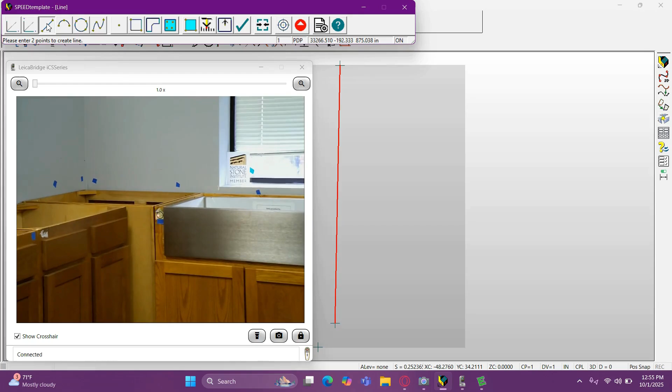You just heard my software create the line, and it made a red line on the screen. So I can now just independently move on to the next surface and draw. If there was something in my way, or if I needed to move my laser to capture a better perspective, I could do that from this mode. That is something that cannot be accomplished during the actual countertop tool—once you start, you need to commit to finishing the top when using the countertop mode.

So here we go, we're going to take our last couple points here. Here we go. And then the last edge right here.

Then what I'm going to do is shift my mode when I'm ready to draw the wall in this case. Now this isn't necessary, you don't have to do this—some people choose to stay in the 2 point line mode and take multiple lines across the back wall and connect them later. But what I'm going to do is right click on the line mode and choose the 2D continuous open line. The mouthful, I know, but all it is, is just a line chain. That's all that's really happening here.

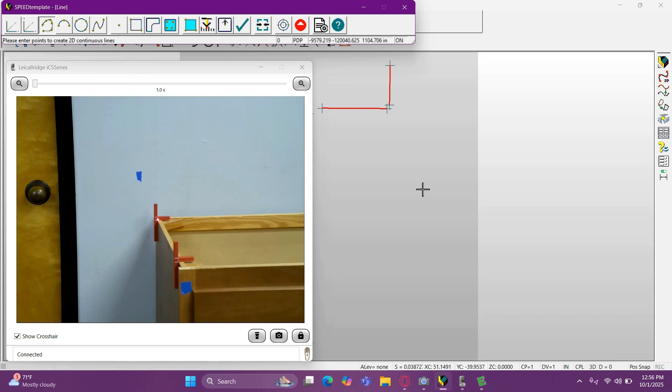It's really similar to the countertop tool's version of scribing the wall—that's pretty much what's happening. You need a minimum of 3, but you can take as many as you want in order to capture your scribe. So I'm going to be doing that here, taking my points along the wall.

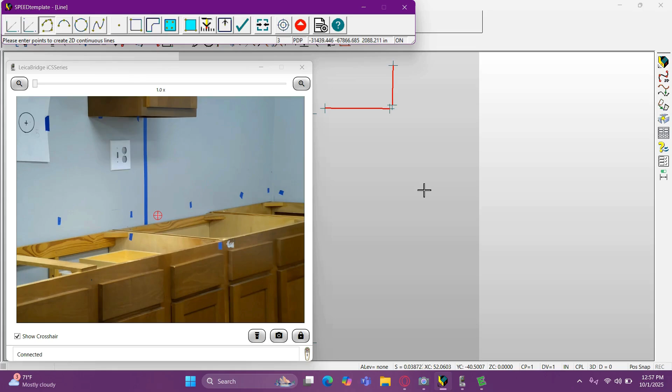Here we go. There we are. And getting closer to the end here. Now I want to take a quick moment to show you my drawing. You'll notice I have a black line here versus a red line. That's kind of going back to the temporary lines that you saw before.

This is in fact a temporary line and will not be permanent until you hit the calculate button. We're not going to do that yet, but you could, in this case, complete this wall, click on the 2D continuous line, and start another one. That would then have 2 separate line scribes.

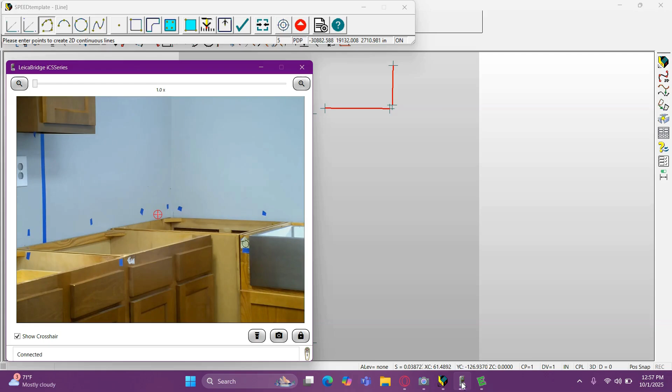I prefer to continue through the wall like so, and I'll go back to my laser's perspective here. Then I'm going to go ahead and just draw the next wall while still in the same continuous line. Oh, got to make sure I took my point there—one second, here we are. And then we'll take another one roundabouts the end here.

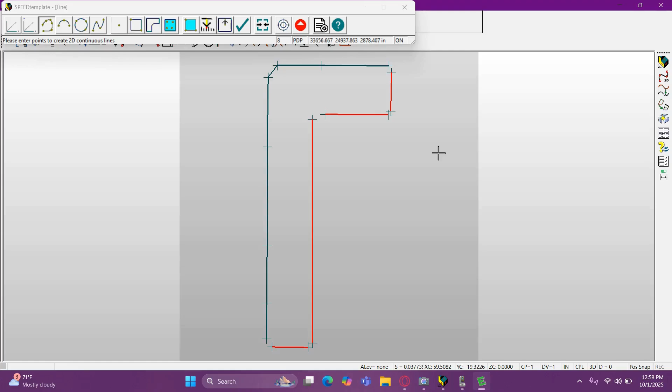There we go. So now going back to my drawing here, you'll see I kind of have a little bit of a chamfer. What I'm going to do is calculate—I'll hit the check mark just like I did with the countertop tool, and it will complete it, and you'll notice it now matches the rest of my colors.

So in this case, what I can do is simply click on the chamfer line here, and then I can delete it out. I'll make my software a little bit smaller, and you'll see the delete button is right here. There we go, and now I have a manual countertop.